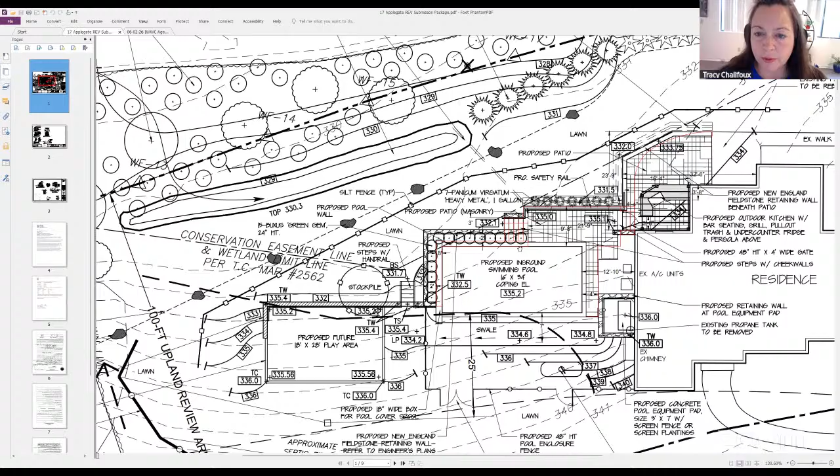Okay, is everyone able to view this clearly? Yes. Correct. Okay, so just to give you a little background, when Mr. Juliano went to apply for his building permit, an issue came up with the barrier to the swimming pool, because if you recall, this corner of the swimming pool, sort of the upper left corner here, was basically a retaining wall. The pool wall and retaining wall are one and the same. And it came to the building inspector's attention that what if someone were to walk on top of this pool coping and fall because of the wall height?

So that resulted in a minor change of just adding a 2-foot wide planting bed here and a tightly planted boxwood hedge. So 15 boxwood green gem are being called for just to create this very dense hedge so that a person is either discouraged from walking here, or if they do, they're not going to fall off the wall.

And also another minor modification was Mr. Juliano realized that he really wanted an automatic safety pool cover. So the pool lengthened ever so slightly, just another about a foot to accommodate the automatic pool cover at the deep end here. And what we did to stay within as close to the footprint that was previously approved as possible was we narrowed these stairs that come down from the pool patio to the lower lawn. And we just wanted to have the least amount of impact, by not pushing activity towards the wetlands area.

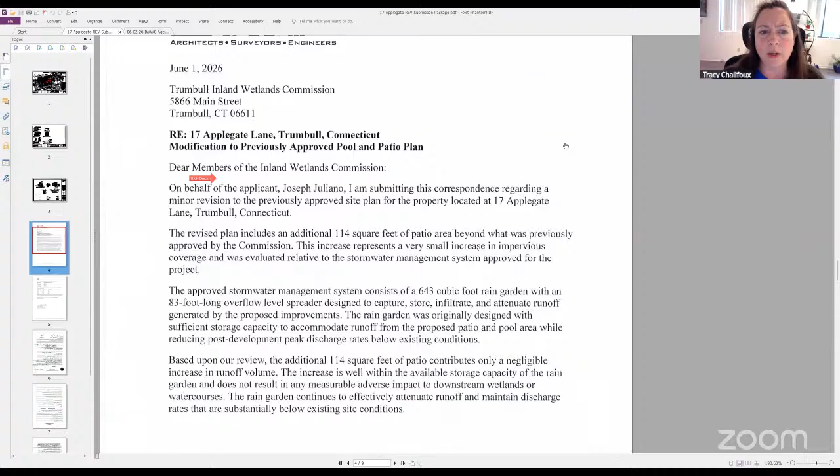And on June 1st, Manny prepared this letter. I don't know if this has been shared with the commission or with Tatiana, but he basically says that it represents a very small increase in impervious coverage and was evaluated relative to the stormwater management system approved for the project. So basically we're covered, it can accommodate the small increase.

So that's it in a nutshell. I'm happy to answer any of your questions and make any clarifications. Thank you.

Right, Tatiana, do you have any comments? Not at the moment. If you don't mind, Tracy, could you please send this to us? I don't believe we received this letter. Of course, thank you.

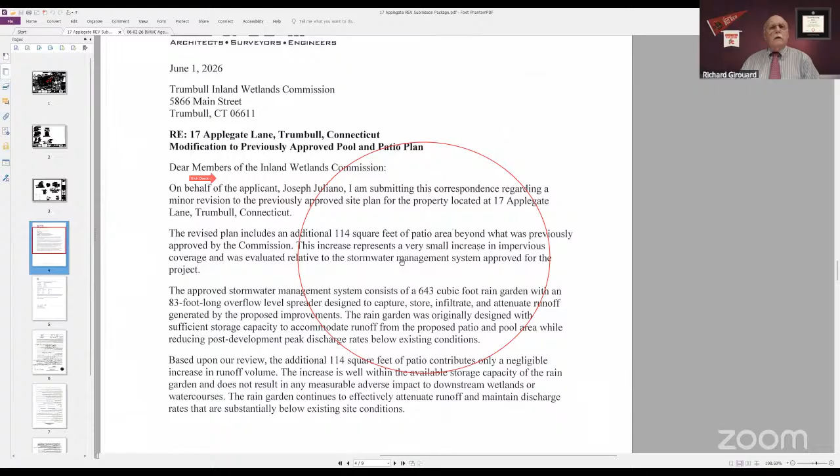All right, John, Mr. Chair? Mayor? Okay, go ahead, Carmine. Tracy, the application mentions a pergola, but you did not mention where that is, and I don't see it.

Yes, thank you. I neglected to mention that. I will show you now. The pergola is here, I'm tracing the perimeter of it. It's an open air structure, just some probably light wooden slats supported on a few posts, right within this area above the outdoor kitchen.

Is that allowed with a grill like that? It may depend on the material of the pergola, and we're not that far with the design of it. I don't know if the owner is considering like a composite or a metal type structure. We don't have the details on this at this point in time.

That's usually a fire marshal issue. We could check with the fire marshal to see what is acceptable. It's true, David, but Carmine is putting on his Nichols fire hat there, so he serves on that commission.

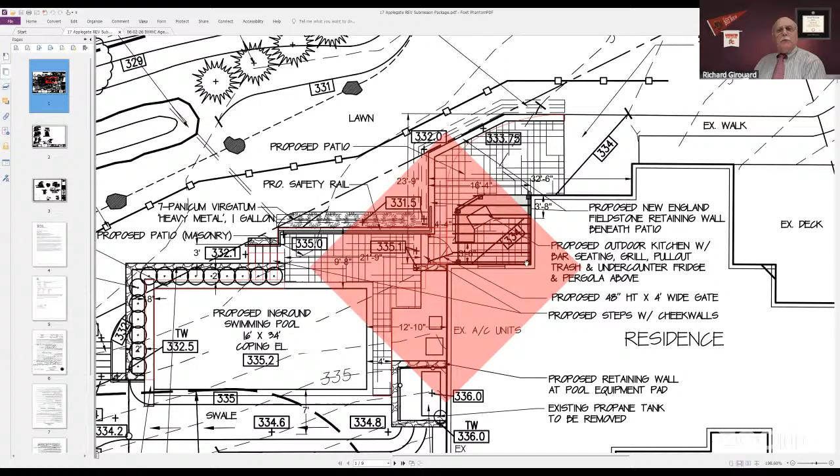All right, any other questions? No, I'm not the fire marshal. No, but you're there watching out. That's good, it's a good question. Anything else, Carmine? I don't pay their bills, I don't fight the fires. There you go.

All right, any other questions from the commission? All right, looks like we're good.

Nope, no. Can you see that? Tunnel vision. No, it's just gone. Is it something with the pointer? This just happened, started on the last application too. Is this something with Zoom, Bill? I've not seen that before, and I'm on a lot of Zoom meetings. Just blame it on Bill. That's it, I will. Is there a setting for a pointer that got messed up?

Let me ask, is Tracy working with you? Tracy, are you working with this applicant? Can you hear me? Yes. I'm sorry, I was away for a moment. Are we on Governor's Ridge? No, not yet. It'll be a while. All right.

At this point, maybe we should table this and go through a couple others, and let her see if she can get somebody to help her with that. Good idea. Should we have somebody else test the sharing of screen to see if there's an issue with Zoom? I'll do it. It won't let me, I'm blocked. Somebody else want to try it?

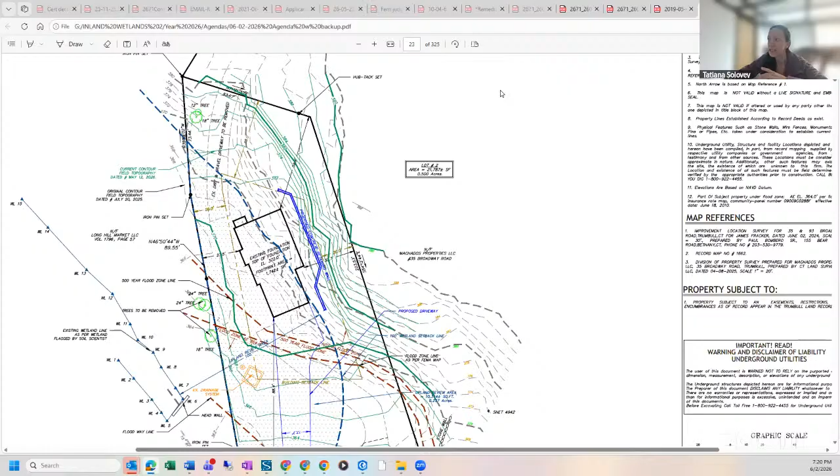She's sharing her screen, but we're getting the same issue with the big red diamond. I saw it pop up, but then it disappeared. Do you still see it? No, I don't see it at the moment, it disappeared right away. All right, Veronica, would you like to share your screen again? I'll stop sharing. Sure. Okay, I'll also email you the presentation, so you're probably going to receive it if we can't show it here.

Tatiana, is this a presentation? Have we received this? Can you see my screen now? Yeah, so far so good. No, this looks like it's just the PDF itself. Yeah, that's the PDF. Yeah, this looks good. Okay, can you see the entire screen? Awesome, thank you, the entire PDF we can see. Yes, that's what we need, right?

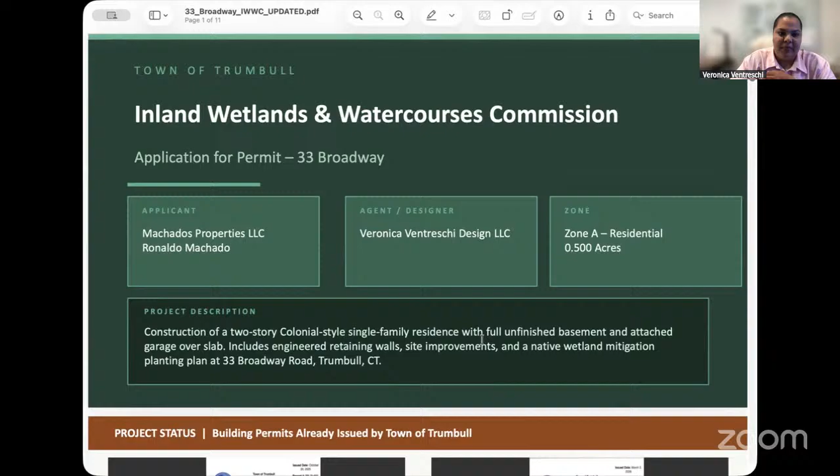Okay, so we are here for 33 Broadway in the name of Ronaldo Machado. We are planning to build a two-story colonial style single family home with a full unfinished basement, and we have an attached garage as well. Okay, let me interrupt you for a second.

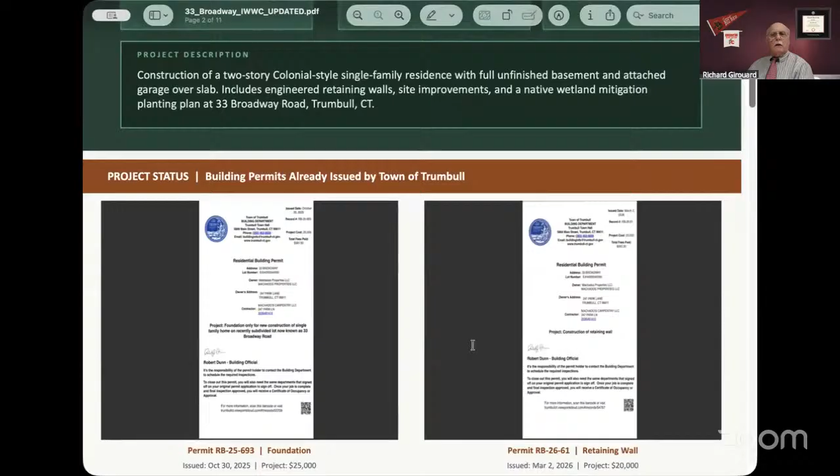We're seeing nothing on the screen that's showing a plan. That's the next one, we can see the PowerPoint, Mr. Chairman. Yeah, she's on the intro page. All right, can we move to the other one? So as you're talking, I'm just giving you an overview of the application. So here we have the two permits that the client has already got for the property. We have the residential building permit for the foundation, which is already in place in the lot.

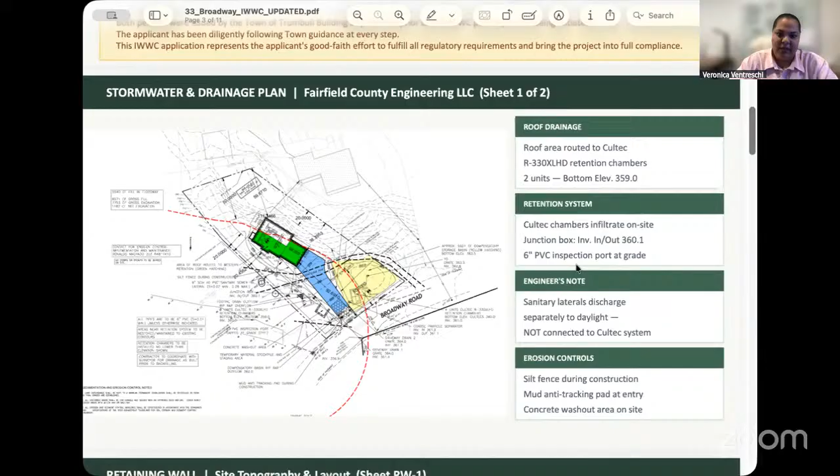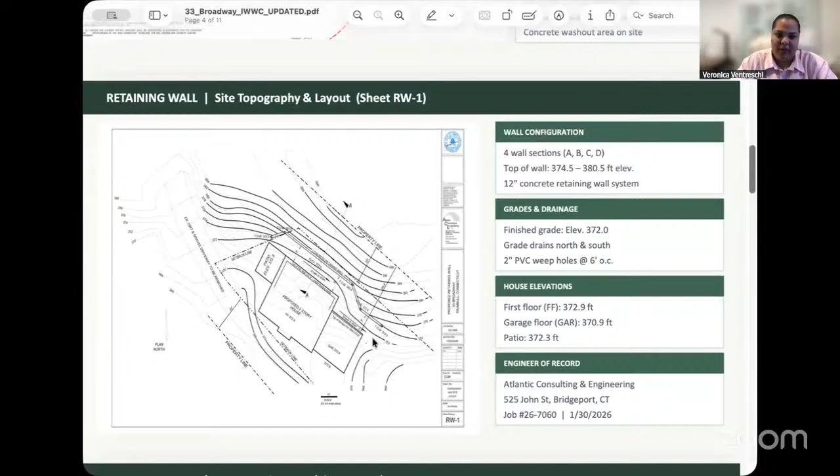And also we got the retaining wall permit for this application, issued by the Town of Trumbull. We have the storm drainage plan that was reviewed per Tatiana's request. So everything is in place. The engineer is already in the meeting, if you guys have any questions he's here for that. We also have the plans for the retaining wall in the rear of the property, that in the walkthrough we could show everything that's going to be built there. We have the drainage system for that as well, and also we have the revision of the survey.

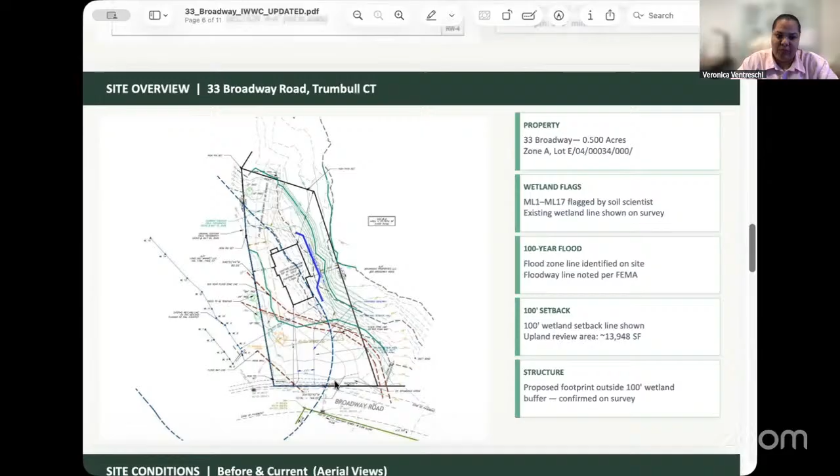Then we have the FEMA line in here, and we have the 100 feet wetlands line here also. We have the retaining wall showing in place. We have a minor change from the beginning of the initial process, which was the driveway. Initially the driveway would access the front of the house, and now it's sideways. That's the change we made for this project.

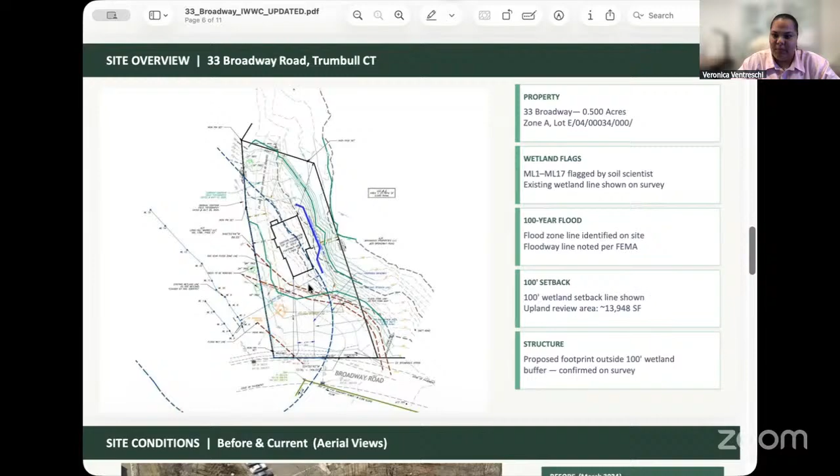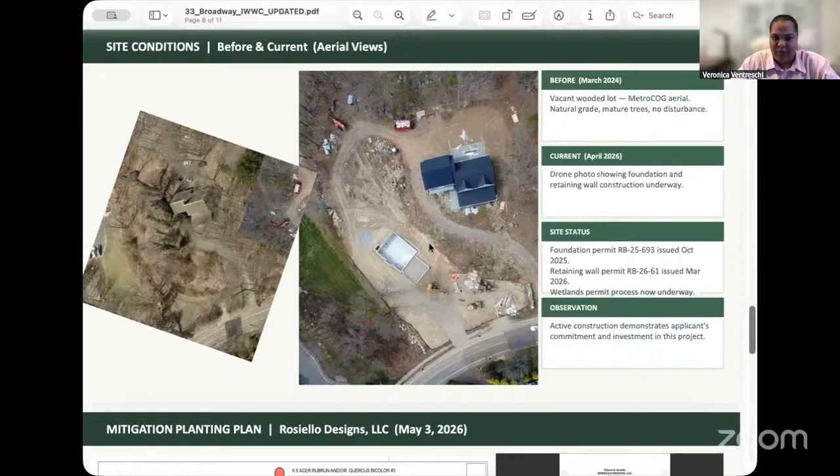Here we have the before view. Before it was just one lot. We made the subdivision process, and now we have 35 Broadway on top for the existing house, and the new house is proposed on this area of 33 Broadway. Here's the photo of the existing site, so we have the foundation here on site, the garage, and here will be the driveway to access. Also, we're going to have the retaining wall in the rear of the property.

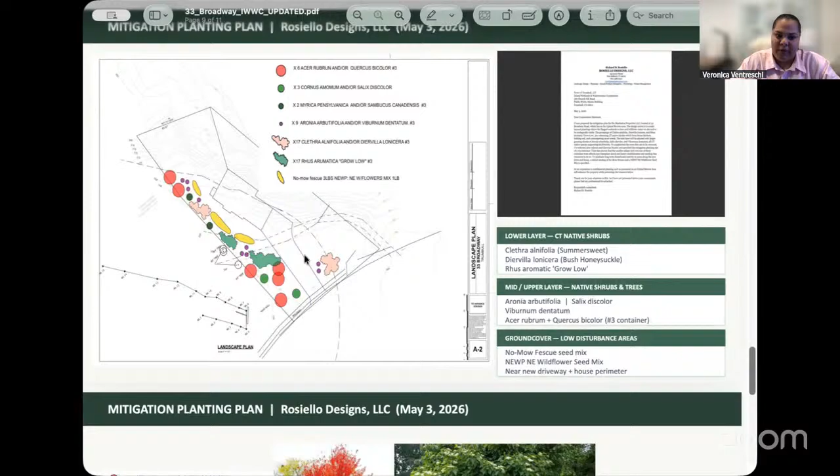Also, we have the landscape plan. Unfortunately, the landscaper wasn't able to join the meeting, but we have updated it as well with the new driveway. So we have to relocate some trees that he proposed.

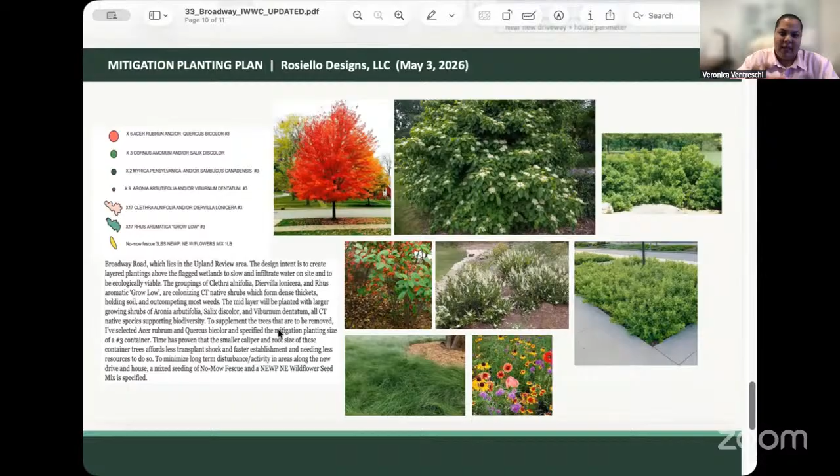All the trees are going to be CT native. He made all the plans to situate near the wetlands line and FEMA line as well. And that's the overview of the application.

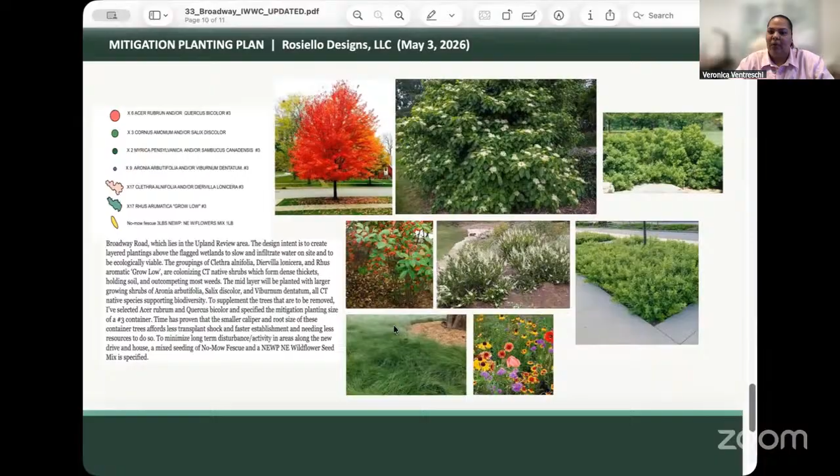If you have any questions, the civil engineer is here, and the client's lawyer and the client are on the meeting as well. Tatiana, the planting plan was the one that we got on Friday. That came in late, right?

The hard copies, the full-size hard copies with topography, were dropped off on Friday, that is correct. But I think a smaller print was submitted earlier, with the application as well.

Reason I'm asking, did Bob or David, do either of you have the planting plan before you, or have you been able to see it? I'm looking at it on the screen right now. The planting along the wetlands and the property line, that's going to get

modified by the request from the property that they've encroached on. So that is going to be modified, and I'm very concerned about the steep slope behind the retaining wall. I know it's beyond the 100-foot setback, but that's an environmental concern right there.

per neighbor's request by Green Giants, but they have to be planted on Soretta's property, not on the subject property. So applicant has to still plant everything that's shown on the screen, in addition to the trees that they have to make up for on Soretta's property, correct? Yes. Okay, thank you. We are talking about these trees located next door, right?

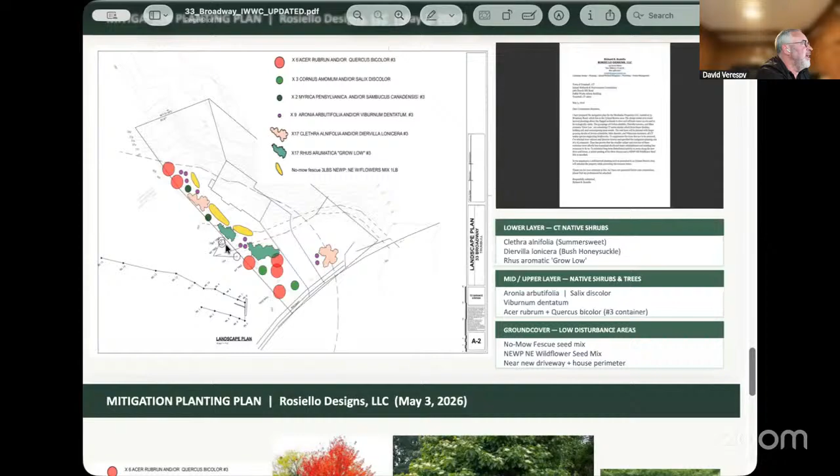My concern there is we're taking native shade trees and replacing them with green giant arborvitaes, which have very little environmental or ecological value other than screening. I think if 3 deciduous shade trees are impacted here, which looks to be the case, or maybe 4, that should be replaced with 4 deciduous trees that are native as well.

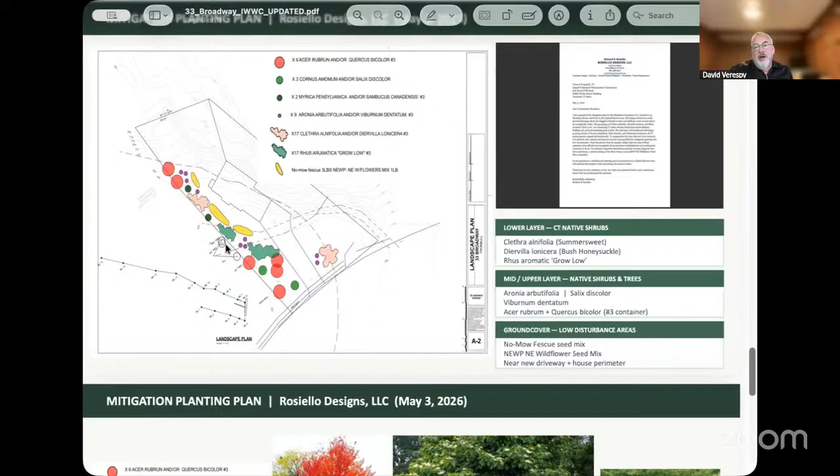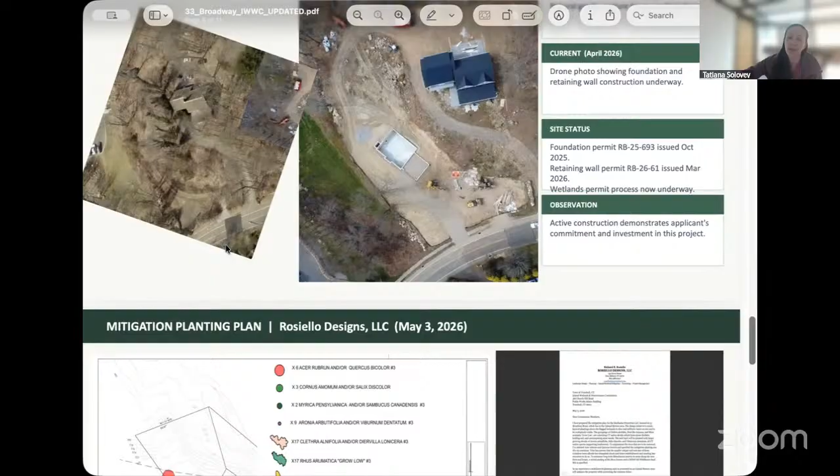Okay, thank you. So they would have to add 4 deciduous trees to this plan in addition to what's being requested by the neighbor, right? Correct. Wouldn't Mike Soretta have some say in this too, though?

It's his property. Oh yes, John, we have received a letter from the neighboring property. Excuse me, it is attached to the agenda. Yeah, I saw that. You saw that? Yes. Let me ask you a question, Tatiana.

If this were brought back down to the original topography and all that, would these trees not be as impacted? Because right now they've got somewhere between 2 and 3 feet, maybe more, of soil retained. They're going to be dead in a year or two. So Bob, you could answer this better about the impact of compaction and soil, and it's hard to see what kind of trees these are.

Basically what happens is with the addition of any material over the system here, the oxygen levels are being reduced, water levels increasing, and a rot takes place. Basically suffocation due to water, or a lack of air, a lack of oxygen on the root system, and it is a slow death. Even minor additions to the root system are critical to the survival of the tree, let alone multiple feet. Even inches would ultimately affect the tree going forward.

All right, thank you, Bob. So back to Tatiana.

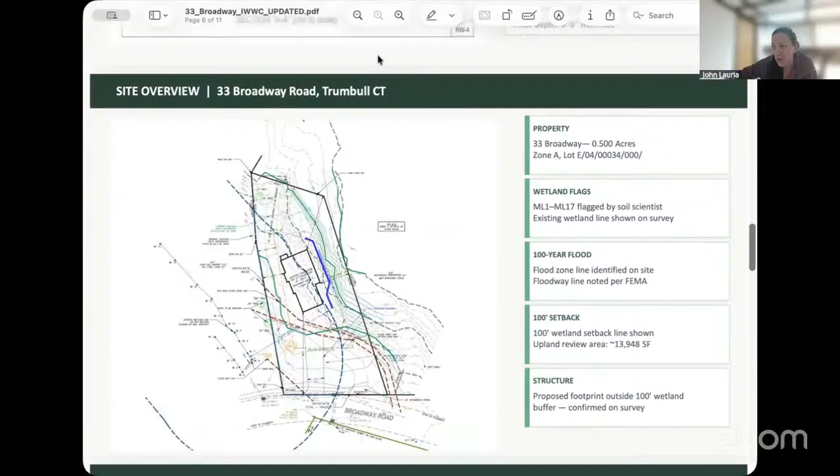Veronica, would you like to, do you have a survey? Yes, we do have a survey. Yep, that's this one. It's kind of reduced, so it's hard to see if you zoom in, but it looks like it's about a couple feet, I think at least, because I live in that area.

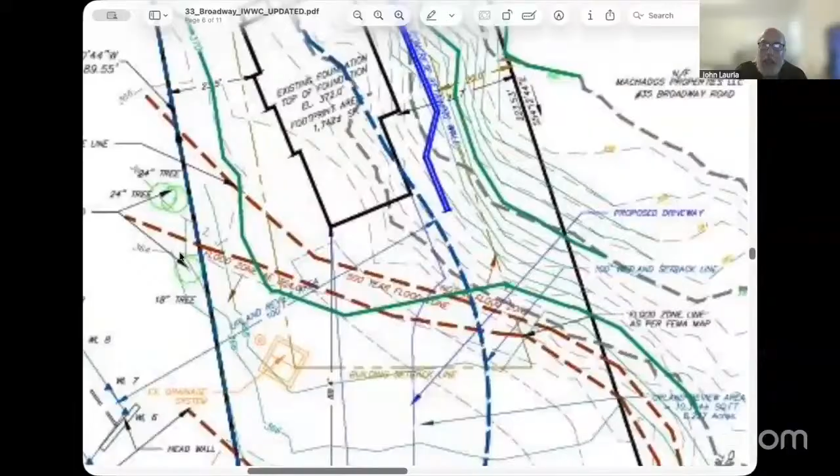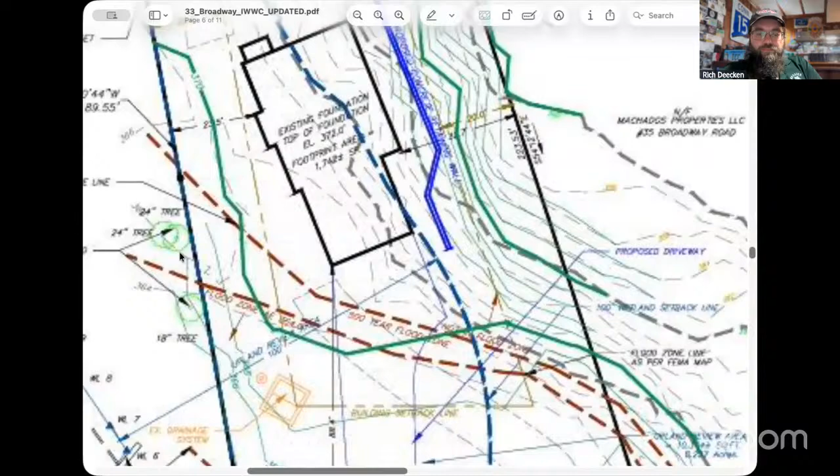If I could say something about that ground there where that house is built, it's a bog underneath there. I don't see how they could put a footing down that deep. What they did, in my opinion, was they put a footing down, built walls up, and then pulled all the dirt from the hill down and built up around the house. That's all built fill. That's not native soil. That's why we have a problem now with the floodway, because it's been filled in. What's there is there, but it was done wrong.

A question for Mr. Lauria. Go ahead, Rich. Mr. Lauria, John, are you concerned about excessive erosion? I mean, if there was substandard work done here, if somebody cleared out the area, it's going to leak.

What happens to the foundation of the house really isn't a concern of the Wetlands Commission, is it? But I'm concerned about what's down there under those footings - it's a peat bog. Well, we know that from the work even next door. And Mike Serta even told me that's why they didn't build in that last corner. He says it's all mud back in there.

So I guess the bigger concern, John, is are you more concerned about the foundation crumbling or that the entire yard is going to erode into the floodway? Well, we've actually added a big slope into the ravine there, into the Farrars Brook. So when water comes sheeting down, I don't see how that water detention system they put in is going to do very much. It's putting fill right next to the stream.

Isn't there also a significant amount of sand that was placed there that has no anti-erosion value? I think the material you see on the side of the hill is what was used, that's why they took the hill down. So a lot of that area was sand - what you see in the hill. No, before it was much more level, closer to the same level as the street. It did have some elevation above it, of course, but not as much as it has now.

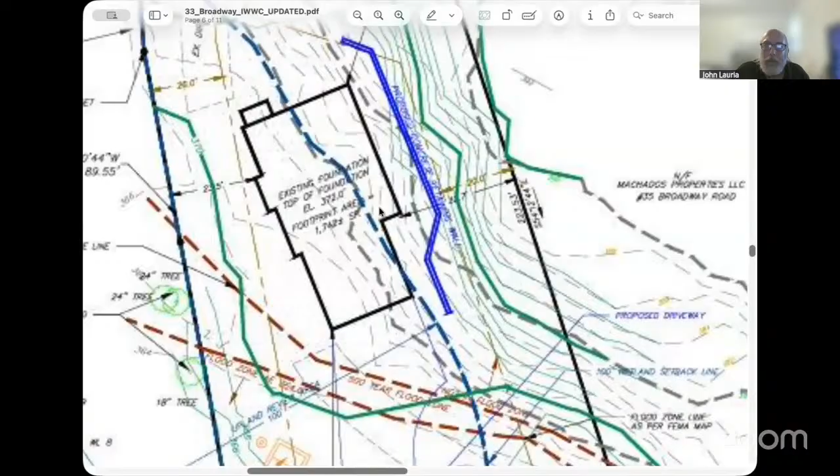I didn't have anything to do with the footing, the foundation, or the site work that's been done on the property. I just - regarding the drainage system, right, could you clarify the change that we made?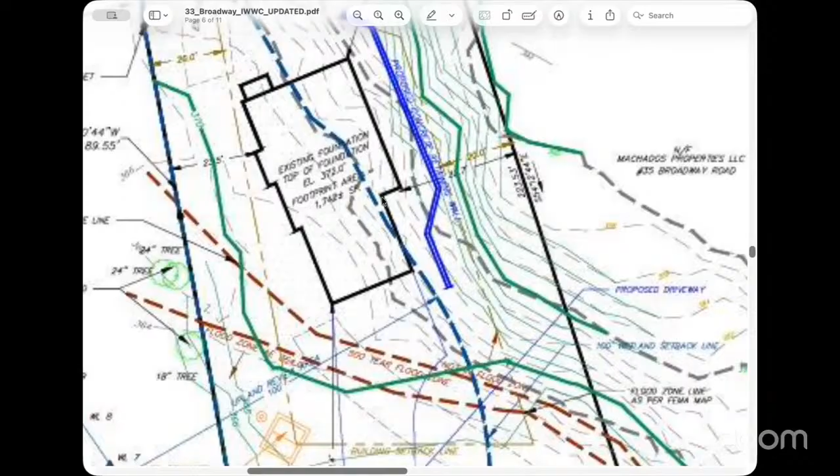Did you have anything to do with - can you tell us about the contours here? I don't know what the pre-existing contours were. I only had the existing. I'm sorry, all I have is the pre-existing contours, the original, at least as far as I believe, the original contours of the property, and what is proposed. I can't say what is out there right now. We have the photos of the before.

The state has LiDAR that goes back a few years, so we may be able to pull it from that. You can see it on the left there, even. Yeah, that was the pre-existing condition. So this was the berm here as well. You can see the berm on the left side.

And John, can you see that was that now removed? We're above the berm. Was the berm removed or did it die? No, we put more dirt that's higher than the berm now. Is that what directly led to the trees failing?

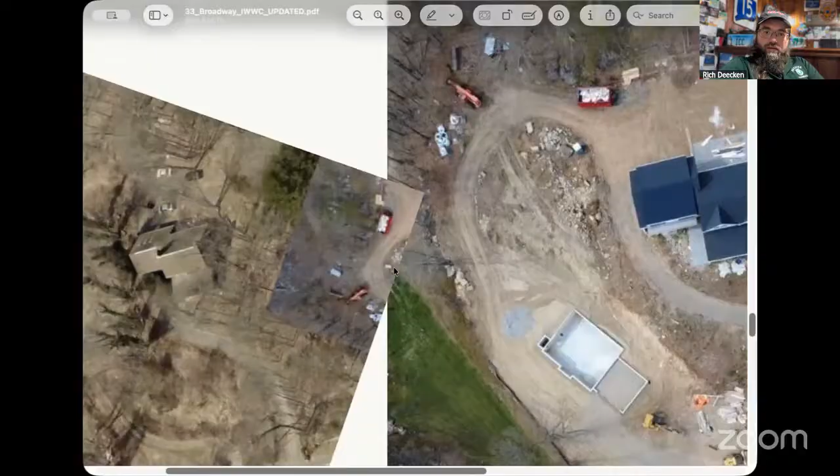Part of it. This is the before and this is the existing conditions. And so the dead trees would have been right on the left side? Yes, correct, down below here. This one was right here.

And when they removed those trees, that area was filled with sand? They didn't, you mean in the top? Right. They filled that with sand? No, they didn't fill here. Oh, okay. They're going to build the retaining wall right here in the rear. Okay, that's the plan. All right, Tatiana.

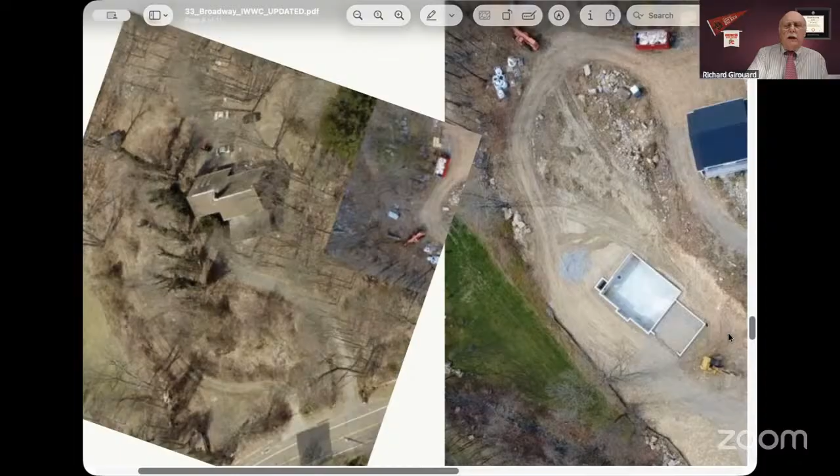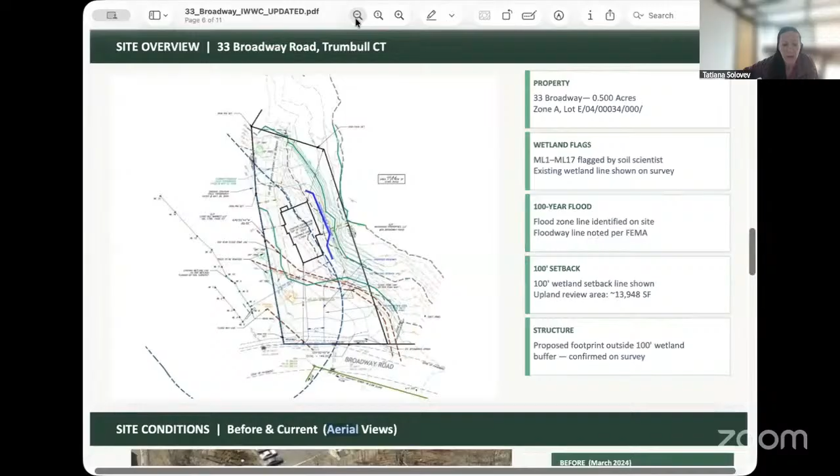Again, one of the conditions is going to be restoring the floodway. Can you go back to where it shows the floodway with that green line? Okay, are you with me, Tatiana? I'm here, yes. If I may, Veronica, ask you to stop - this is a reduced plan and it's kind of blurry, at least for me. I don't know if the commissioners may benefit from a clearer image that I'm happy to put on the screen. All right, if you can stop sharing and let Tatiana put hers on.

It's also attached to the agenda. It's the survey that was submitted. Sorry, let me move this. But you can see the pre-existing topography is depicted on the survey. So the 364 contour is now overlaid by 368 and 370. So there is fill about 2 to 4 feet according to this.

The floodway specifically, however, is in this corner. You see the red dash line. Yes. And there is about 2 feet of fill over there as well. So that all has to be restored.

However, this survey also does not encompass Soretta's property. So if any fill was placed beyond this property line, which it looks like it has been because there is encroachment there, it all has to be removed. The floodway has to be restored completely to its original condition. There can be no fill in that area whatsoever. And that also pertains to the boulders that were put down by the head wall? Correct. All right.

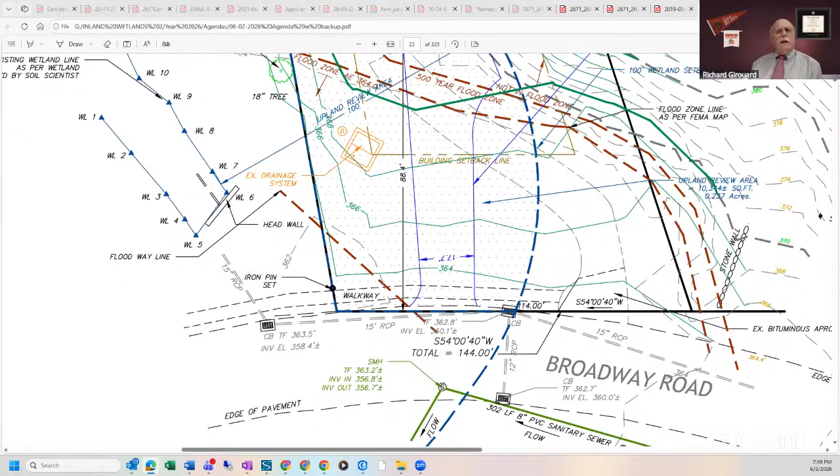So it looked like where those trees were, that's why they ended up buried, because somewhere between 2 and 4 feet came into that area? That's what it appears according to this survey. Yes, if we look at there's this yellow note that keeps popping up, but this is 364 contour, right? This line, this line. And then the green bold is 370. Let me see if I can highlight it maybe - better. Okay, 364, right? So this is pre-existing, and the bold green line...

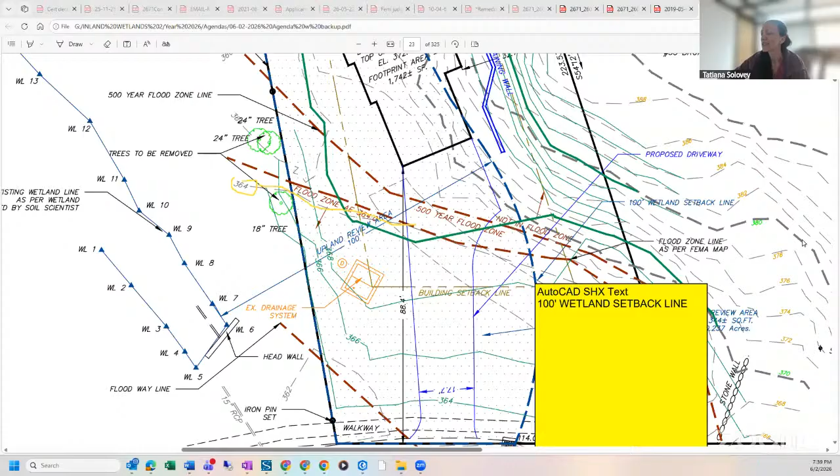Oh my God, I don't know what's happening, guys. But 370 is the existing topography. Does it make sense? That's why the trees ended up getting buried like they did.

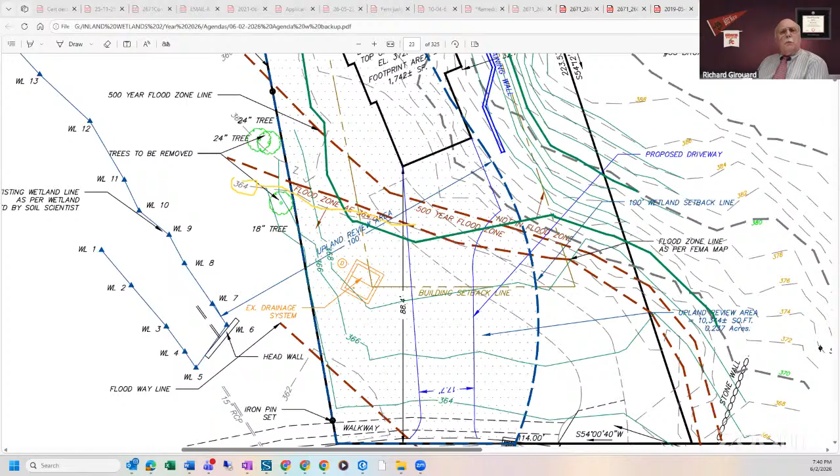And unfortunately for the applicant, you've caused the issue with the neighbor, so that's encroaching on his property now. So we've got to figure out how we're going to handle that. But as I said, you're going to have to definitely bring the floodway back to its original conditions. I'm going to open this up to the other commissioners for questions. Go ahead.

Comments, questions? Through the chair. Go ahead, Rich. There was a mention of encroachment on the neighboring property. Perhaps if Tatiana or others could just explain the level of the encroachment on the other property. I know there was some issue with work being contained to the specific property, and I believe the applicant failed to do so.

So if somebody could clarify how much work was done on the other property and if mitigation is needed. There was some confusion in the application process about that. You mean for 35 Broadway? Yeah, it would have been mentioned numerous times that work had been done on a neighboring property. No, what happened, Rich, is that they filled over onto Soretta's property, and that's what happened with filling the trees. They also put soil and boulders down into the floodway, with big boulders by the head wall. All of that's going to have to be removed. So why was work done on other properties? That seems unusual. I think there was an issue.

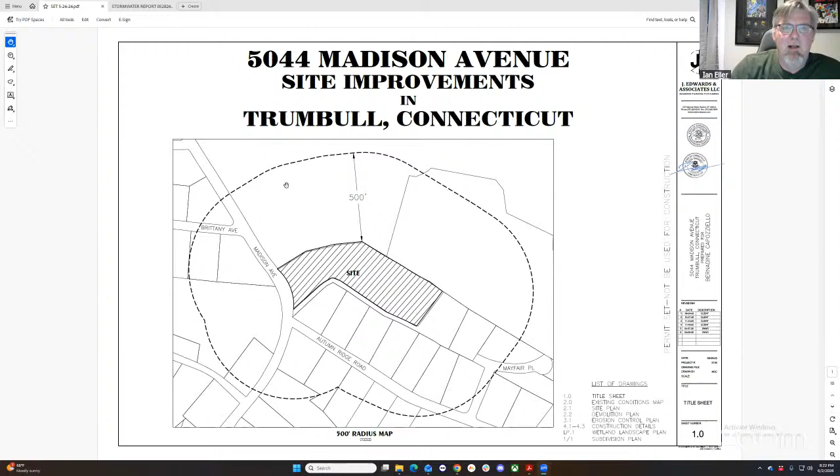Okay, so 5044 Madison Avenue is a single family home. It is on lot one of two from a subdivision. I'm going to spin through here and remind everybody that J. Edwards and Associates did this subdivision in the late 80s. We are this front lot that you see here. There is a driveway and access that leads to the rear lot, which is developed. I'll go back to the site plan now.

So this is the existing conditions plan. As you can see, the site is very, very wet. So our development is limited to the eastern end of the lot. We're going to access, like I said, by way of an existing driveway that leads up, and we're going to build a new driveway that goes in. I'll zoom in here so everybody can see.

We have the house going in and the septic system, obviously. We have the stormwater system here, doing some earthwork to get the house in, but trying to stay limited in the amount of disturbance as best we can.

I believe you guys had a walk, so you've seen what the layout is like. We had comments, and I will go through those unless somebody has a question before I start.

Oops, oh no. I have a question. Sure, back up to your existing conditions, please. Yeah.

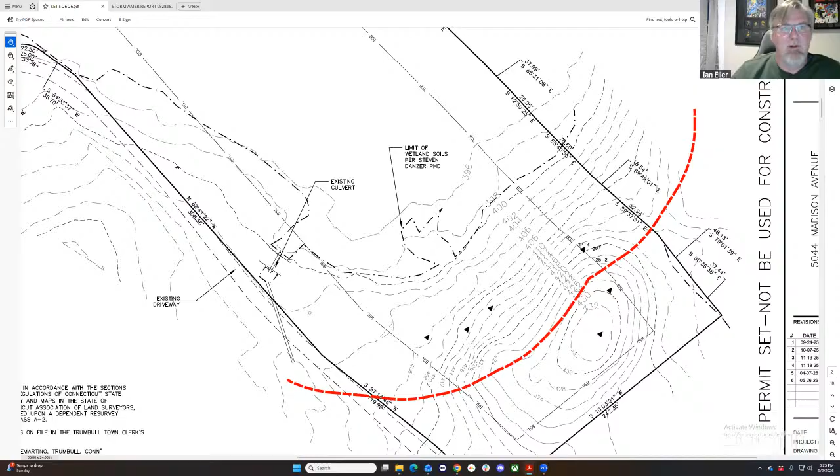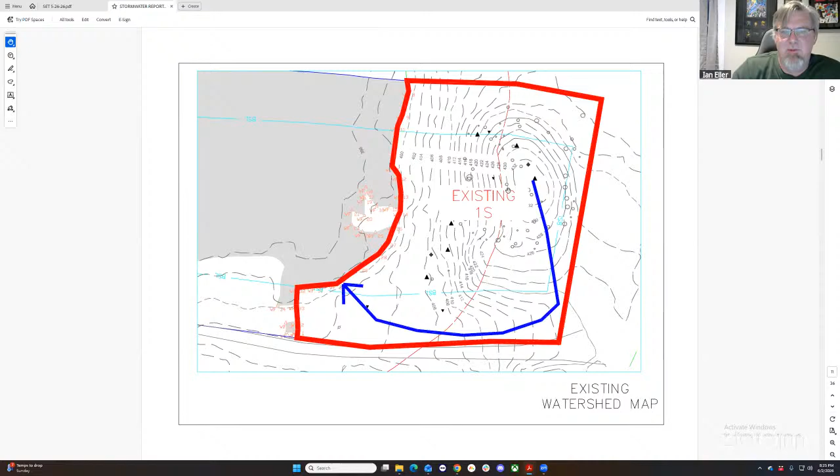So with regards to the comments we had, they were sent to us dated 4/7/2026, for the record, from the Town of Trumbull Engineering Department. The first comment was with regards to the drainage report, which you guys should have. I have it here. Specifically asking for watershed sub areas, and these have been added to the drainage report. So the main existing area and then the bypass area have been put in. We also have the typical soil types and that sort of thing.

Comment number 2 was with regards to the grass swales. The engineer on the project gave the following response, and I'll just read it out for posterity. Let me read the comment that was made for context: consider alternative to grass swales, splitting the SMS system, shortening swale length, piping, as they fill up and fail long-term; swale across the driveway must be piped. The engineer's comment was the current configuration is desirable to keep disturbance in the regulated area to a minimum. Two SMS systems would require double maintenance, and the swale is easily accessible for cleaning.

A catch basin has been added to receive the easterly swale. Let me go to the site plan. You can see that a catch basin was added here to the end of the swale to get that water caught correctly as opposed to just pouring through.

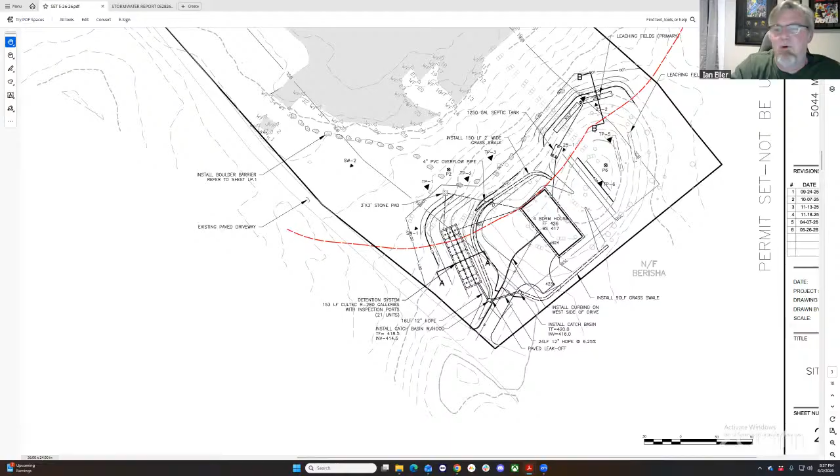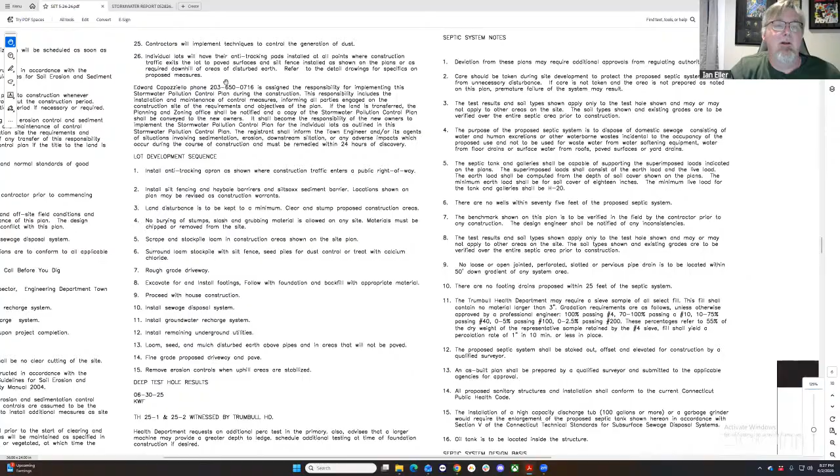Comment number 3 was a question regarding the name and phone number for the person assigned responsibility for implementation of the maintenance and erosion and sediment controls. That person appears in note number 26 under the Stormwater Pollution Control Plan notes on sheet 4.1. Note 26 is the owner of the property. As you can see, we've added that information in for compliance with that note.

The next one is about the bond estimate, that is understood. For the trees, we did add—where is it—a demo plan zoomed in. We indicated the trees and added a demolition plan showing all trees 8 inches in diameter or greater to be removed. Those are all shown in red on this plan.

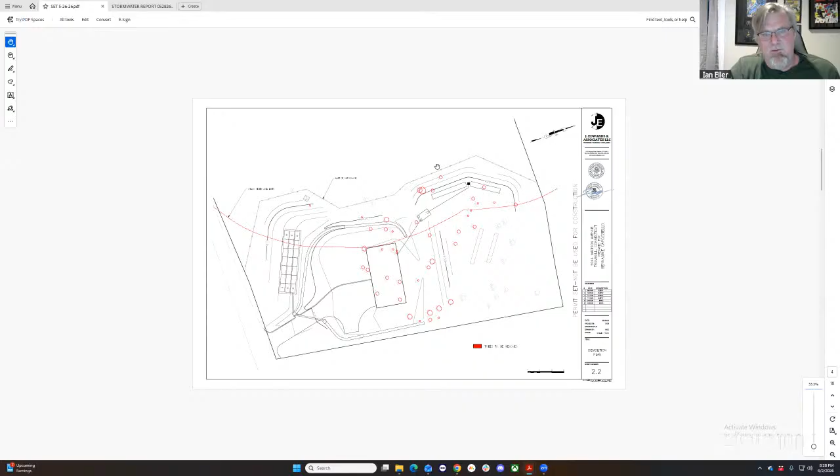Comment number 6 was to consider adding buffer plantings to the area between the wetlands and the house. We have a landscape plan that will show this. If you recall, when we discussed this last time, there was the idea of marking that area to help future owners understand where the limit of disturbance is. So this landscape plan, reflected on our site plan, shows this boulder wall that's existing down here has been extended up through the yard to make that easily understood to whoever ends up living in this house.

Number 7: no debris or stumps to be buried on site. That is indicated on the lot development sequence, on that same page 4.1. Next, provide documentation of driveway and construction access easements for 534 Madison Avenue—that is the piece in the back.

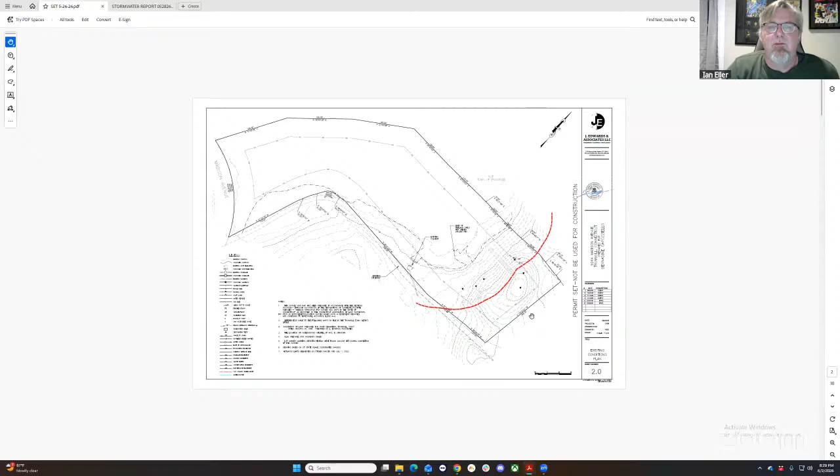So we'll go back here. We have this access, right? And it is accessible by way of... let me share this.

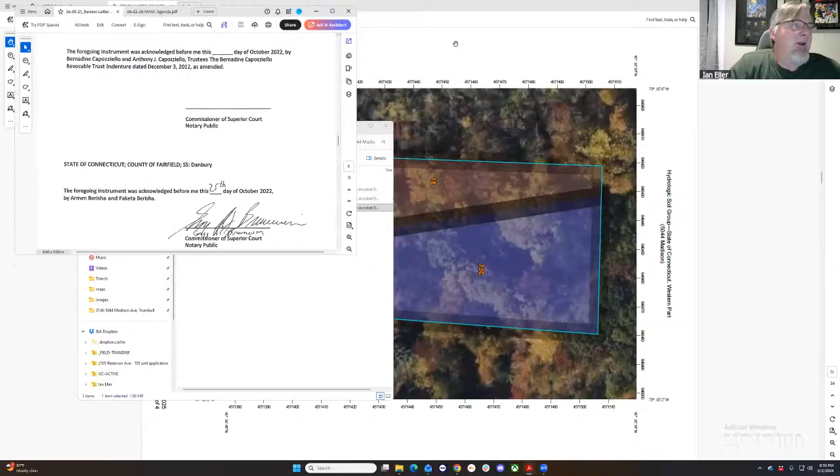That was comment number... oh no, see there's that red again. How many comments are there, Mr. Hawk? We are near the end. I believe there was a total of 10, maybe... oh sorry, there's 12.

So most of the rest of them, the next three are just understood: driveway permits, wetlands permits required, and as-built requirements, and we acknowledge that those are true. And then the final one, number 12, is as part of the site plan review process, a maximum fee of 75 will be charged.

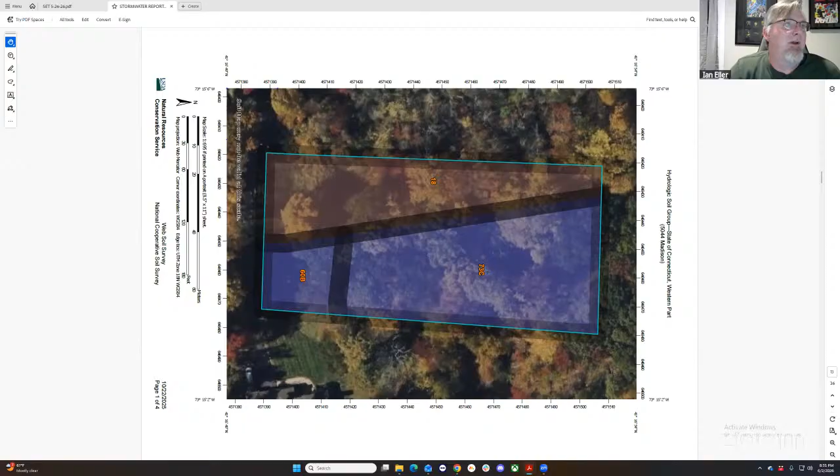So I'm happy to answer additional questions, and get you back to the site set so that you can see what's going on. All right, at this point, Tatiana or John Mayer, do you have any comments, questions?

Quick question, and going back to David's comment, I believe that wetland line shown on the survey is accurate, or at least there are wetlands off-site nearing on that border, so the offset should be corrected accordingly.

Okay, all right, so I will confirm one way or the other on those. As I understand the discussion I had with Nick, those are not accurate or were not flagged. So we'll look into it.

Yeah, it looks like wetlands are maybe on the neighboring properties, so they likely have not been flagged, but since you have a line right there, it maybe is accurate. But anyways, regarding the swale, I think we may have to do minor adjustments just because the 90-degree bend may cause issues long term, and we just see too frequently where they're failing. But that truly is minor and shouldn't affect this wetlands application because it's mostly outside of the regulated area.

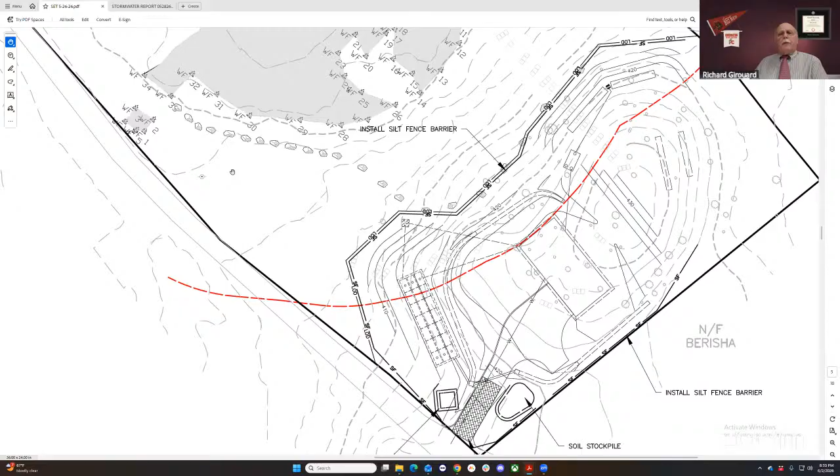Go ahead. Just in review of the landscape plan, my only comment was they've got bayberry on this planting plan. I think a dogwood, like a silky dogwood or a gray twig dogwood or red twig dogwood, might be more appropriate in this location as opposed to the bayberry.

And then a question for the commission is, are we happy with the layout of that boulder line shown on the plans? Does it give the homeowners enough area to utilize the property? Should we think about sliding it down the hill a little bit just so future homeowners aren't inclined to go into that area on their own? And do we need placards? Well, those are my comments, through the chair.

Well, actually, Carmine was next. I'll come to you next, Rich. Go ahead, Carmine. Well, my comment is regarding the boulder. Mr. Eller, I know what the definition of a boulder is, but what size boulder, minimum size boulder were you thinking of putting there? Well, to be honest, I wasn't, because that's with the landscape architect.

If I had to guess, it'd be a big enough rock that you'd trip over it. We're not going to build a wall or anything. No, I'm not asking about a wall. We had a previous application where we asked for a boulder wall and we were a little surprised at the size of the boulders that they put down.

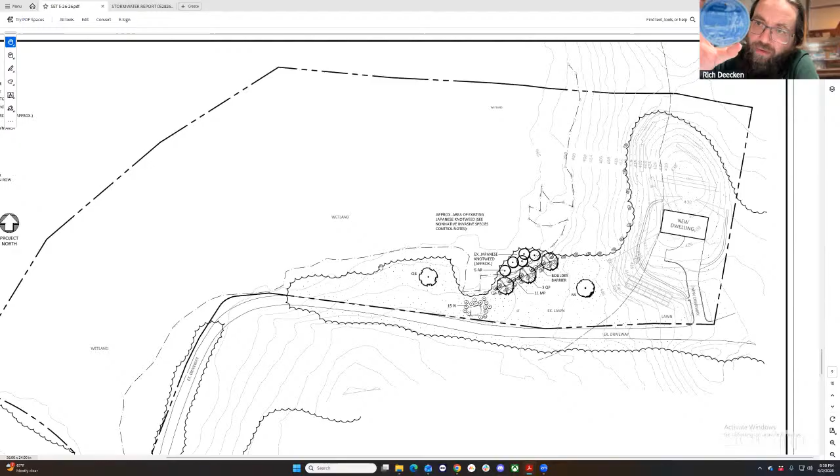But those indicate the wetland boundary, correct? Yes. Through the chair, that's not the boundary though, that's a landscaping demarcation. So would we rather move them down in front of the wetlands themselves, which is pretty obvious once you get down there that they are wetlands.

Okay, let's decide if we want to put them up and where we should put them. Through the chair, I'm going to jump in—that's what I was going to ask you, David, because you mentioned that we're kind of cutting in. Should we be moving this back? Would there be a problem of just marking where the wetlands are and letting them have a bigger lawn?

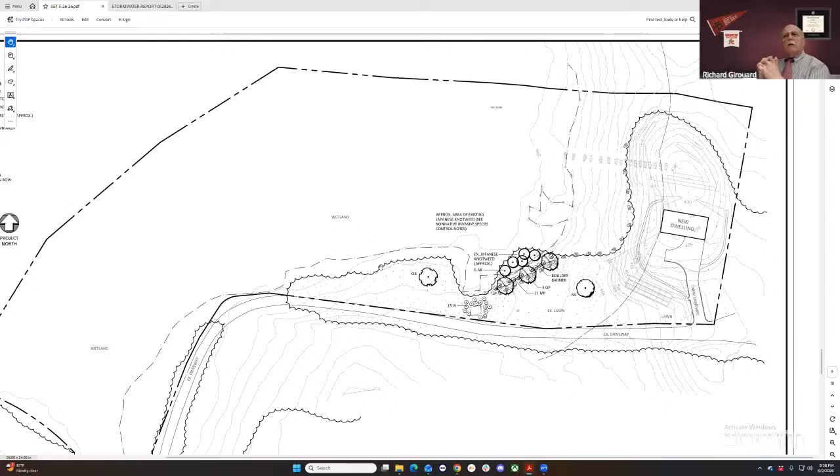Go ahead, David. Ian, can you zoom in on the developed portion of the property on this plan a little for me? Yeah, do you want this one or do you want me to switch to the site plan? This one's good because I can actually read the contours and the contour intervals.

What I was thinking was somewhere the 404 contour is about 20 feet off the wetlands. It's got a big flat area there. Or the 406 contour—you could slide the boulders down to like the 404 contour, or between the 404 and the 406. And the boulders should be big enough that they have to be machine placed and cannot be moved by hand.

And then every 10 feet like we said. But I think getting the boulder line closer to that 404, 406 contour gives future homeowners enough room that they have a decent lawn, should they choose to, and enough buffer area that the wetlands are protected. And if we wanted to do the placards at the wetland limit line, we could do that.

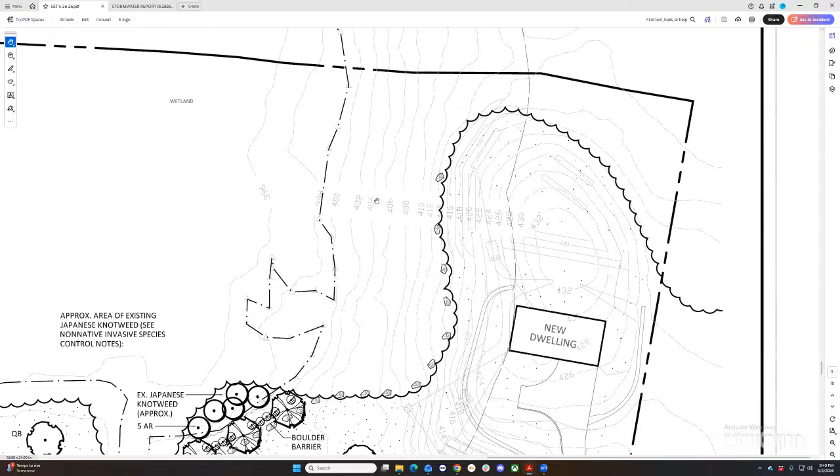This seems kind of strange that we're asking the applicant to cut down more trees. It just seems counterintuitive to what this commission is supposed to be doing for environmental protection. The applicant only asked for so much, but why are we giving more? If the applicant wanted it, why didn't they ask for it? Why are we ordering them to do continued additional cutting?

I don't like that either. I'd just rather give them what they asked for. I hear what you're saying, Dave, but they should have asked for it. I don't think we should be giving away things. Okay, that's why it's for discussion.

Through the chair, go ahead Rich. Just a couple of questions. First of all, there's a listing of Japanese knotweed on there. I'm assuming we're giving them unconditional approval to remove and eradicate all invasives.

I think there should be unconditional approval to remove any Japanese knotweed or other invasives in that area. It's a significant issue. We've seen the proliferation of knotweed and bamboo elsewhere in town. Large stands appear within a couple of years. So we should not only allow them, but require them to remove it. I'm sure they're happy to remove it.

In terms of the wooden posts with placards, the posts are small and easily seen, placed down in the wetland area, 10 yards apart - not a significant amount. We're not asking them to build a split rail fence or add boulders at the bottom, just a few wooden posts 10 yards apart, with placards making it clear there's a wetland boundary. We know the current owner will judiciously watch that, but we want to protect future owners who may not be told - sometimes the realtor doesn't get the full story. Someone in 5 or 20 years should know this is a wetlands boundary and they can't go past it. With wooden posts 10 yards apart, it should be very simple to maintain.

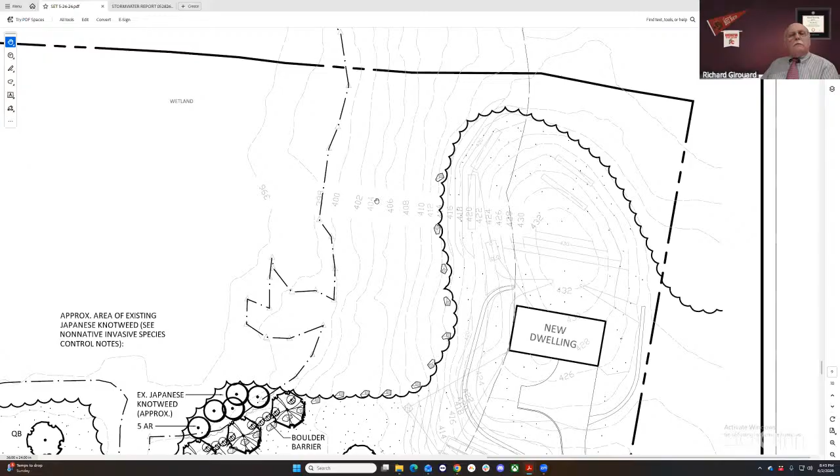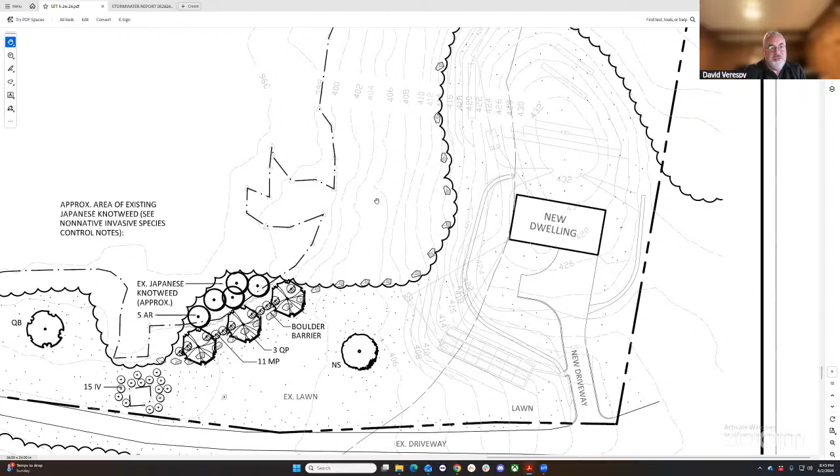The last point I had for David - we had mentioned a number of plants, and I know there was mention of installing new plants there instead of cutting them. I don't know if they had considered small evergreens or a small amount of serviceberries to be placed there. We could add Shadblow serviceberry to the planting list. I think what's shown is certainly appropriate and not uncommon for the area.

All right, Rich, so your thought is we would put 4x4 posts right on the border of the existing wetlands, so they know when they come up, 10 yards apart. It's very reasonable - again, we're not talking 10 feet. 10 yards or 10 feet? 10 yards. Okay, that's 30 feet. Okay, that's all right.

Through the chair, I'd like to make a comment. Go ahead, John. I went over to 17 Applegate today and looked at those posts and their placards - they aren't nailed on. They almost seem like they're being held on by a magnet or something. I didn't want to pull on them, but they're not nailed down. I don't know, when we walk that I'll check that. So you're going to go back over there to Applegate again? Yes. Okay, just wanted to make that comment. They have them up, but I thought they would be nailed, and I didn't want to pull on them in case it was a magnet or not. I don't know how they're fastened.

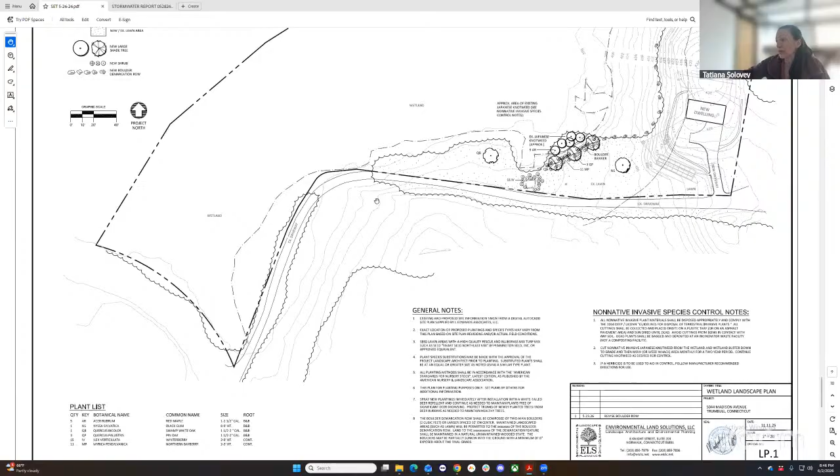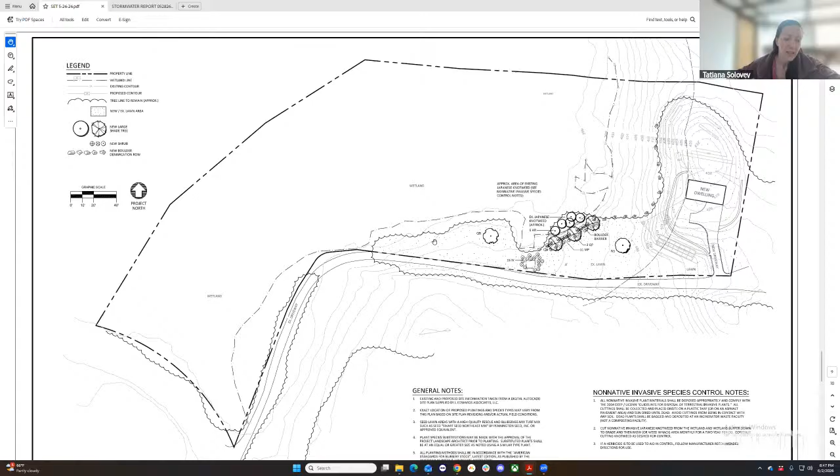Anything else we can think of on conditions? Through the chair, go ahead Tatiana. I'm looking at this wetland boundary and it zigzags through the property and is very long, plus there's potential additional wetland encroachment on the side. Historically the commission has demarcated an area not to be disturbed - I'm not saying a conservation easement, but it makes more sense with boulders and placards to be in one area. If that's not appropriate here, I'm not sure placards should follow this wetland line specifically - it's more disturbance, and it just doesn't make a lot of sense to me. I disagree - that says wetland boundaries on the placard, those are the boundaries. The boulders have nothing to do with the wetlands; the landscape architect decided to put those there, they weren't supposed to demarcate the wetlands, but the placards will. That's my opinion, Tatiana. That's fine, it's just not what historically has been done, and also wetland boundaries change, and those posts on their own won't last, which is why they've been combined with boulders from what I've seen, but it's up to you guys. We do pressure treated posts, don't we?

No, pressure treated 4x4 posts. Yeah, so they should last 25 years. And they should be 6 foot because we're 2 feet into the ground. It gives you a 4-foot high post. That's what we've been asking.

And those are not for the motion. It should be clear that they're not to be removed. If they're in the ground, someone who acquires the property should not be going out there and removing them. Well, that's just common sense. We'll go out there to check every now and then.

Okay, any other items that we can think of? Greg, are we pretty good? Yeah, I was talking to Tatiana about this earlier in the day. We'll probably require a site monitor. We're seeing more and more projects where stuff is not completed or areas are filled in that shouldn't be filled in, so we'll probably put in a condition for a site monitor to make sure the project follows through. It's on here because it's a new project and building.

Through the chair, go ahead Rich. I would just ask if Mr. Cernica could add a condition of approval for the removal of the Japanese knotweed and the other invasives. Yep, on the plan. That's just in the planting area, right? Yeah, in any part of the wetland.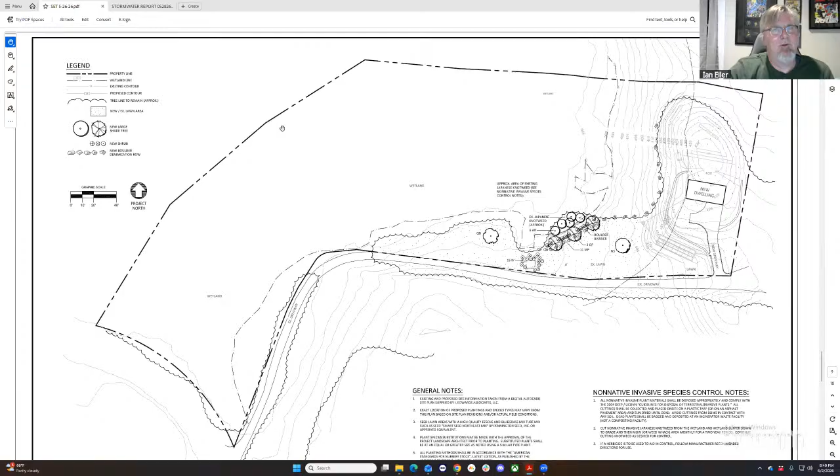That is where that came from originally, if I may remind you. So this boulder line was originally put on prior to the last time we came and saw you, by the landscape architect, to protect these wetlands and some of that clearing and planting that's going to happen there. And I don't remember who it was specifically.

Your commission asked that we continue the silt fence along the limits of disturbance for the actual project. That's why those are there. That was upon your guys' request. So that would be the limit of disturbance then. Correct. All right, thank you. Very good, that's defined, thank you.

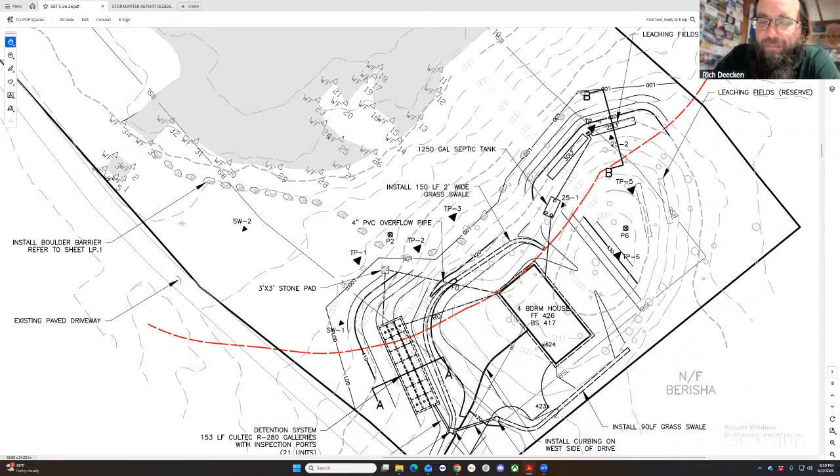And through the chair, if we could just go back, if Mr. Eller could go back to the last map, there was an issue, a listing on the bottom right in regards to the invasives. Oh, the landscape plan? Yes. Hold on. Yeah, to the right of the general notes, it said non-native control. If you could just go a little farther. Yeah, there we go.

Oh, sorry, I thought you were looking for the list of plantings. No problem. It just says that it's being cut and weed whacked. We know Japanese knotweed is going to come back. I know it's limiting it to cutting here. The Wetlands Commission, I'm sure, would be amenable to total removal and eradication if that includes digging these plants out. That should be considered as a viable option.

We're not limiting you to weed whacking, because it says weed whacking monthly for a 2-year period. That means after 2 years, it's just going to come right back. So if the commission is going to approve total eradication, those should be dug up and removed, and giving the applicant the opportunity to do that should be allowed. It's pretty defined on what they can do, including herbicides and stuff.

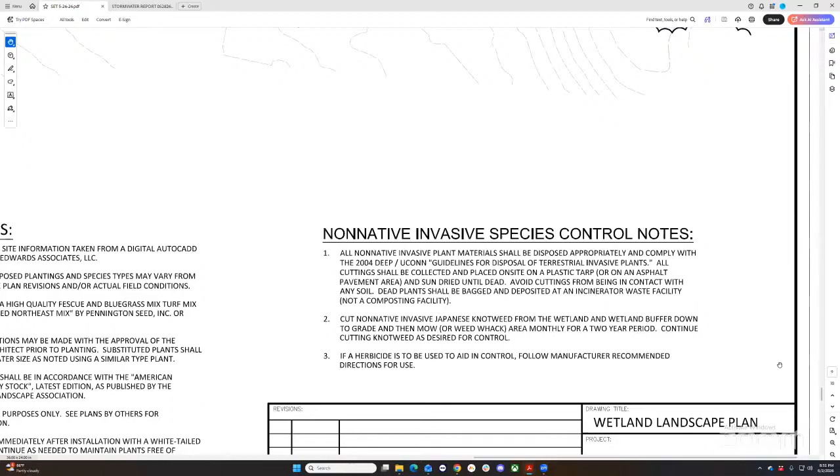So I'm a little concerned about the herbicides, since that wetland may be the headwaters of the eastern reservoir. I believe it is. That's why they should be dug out and removed instead of using pesticide. Of course, we're using pesticides on the golf course, which is the same wetlands too, so I'm not intending to limit them or force them, but they should be allowed the opportunity to dig those up. As it's stated here, they can't go in the wetlands and remove them, they can only weed whack them, which seems somewhat silly.

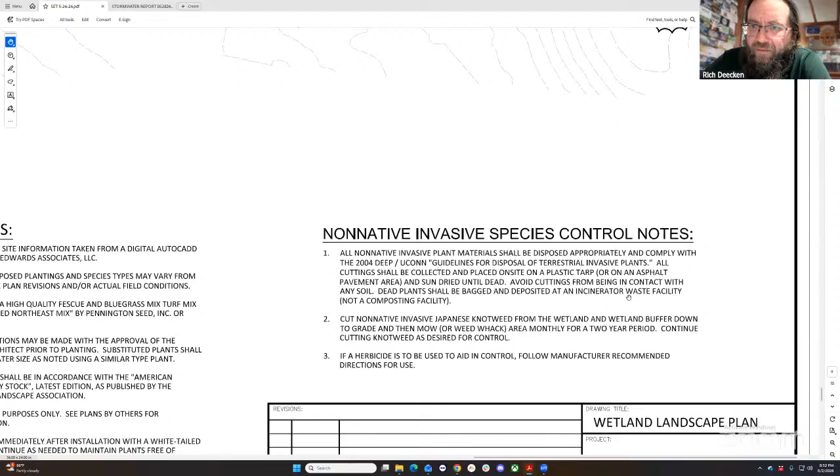So Greg, I need a motion to approve. Yeah, I'm still not clear what they want to do with invasives. I know we want to remove them in that wetland buffer area, but do we go into the wetlands or not? I'm just going to say the buffer for now. I think we are allowing them unconditional approval to go into the wetland strictly for the removal of invasives.

No clearing, but they should be allowed to remove them at any point in the entire wetland. That should always be approved and encouraged, by hand, spade and auger. That's a huge wetland, it's just loaded with phragmites and everything. We're not giving them permission to do the whole wetland. They're not there, it's unlikely they're going to, but with spade and auger, no machines, giving the homeowner the opportunity to remove them instead of saying there's invasives in this wetland, you're not allowed to remove them.

Those invasives are causing serious trouble. We've seen bamboo stands across New England, certainly across Trumbull. It allows the applicant at his or her leisure, when they see there's a problem, they can go in there. Probably do it anyway, Rich. But right now, this way they have permission to do so. Yeah, we're giving them permission, we're not ordering them. Permission to dig up those particular invasive plants, and that's that.

All right, any plant listed on the non-native list is approved in that area. Right, native northern southern New England. Or what Dave would probably give us the specific region. Was it listed as southern New England, David? For invasives? Is there a specific region where we go by? Connecticut has a list, it's the Connecticut Invasive Plant Working Group. Excellent, they have a list. Any plants on that list are eligible for unconditional removal. Yes, that works. All right.

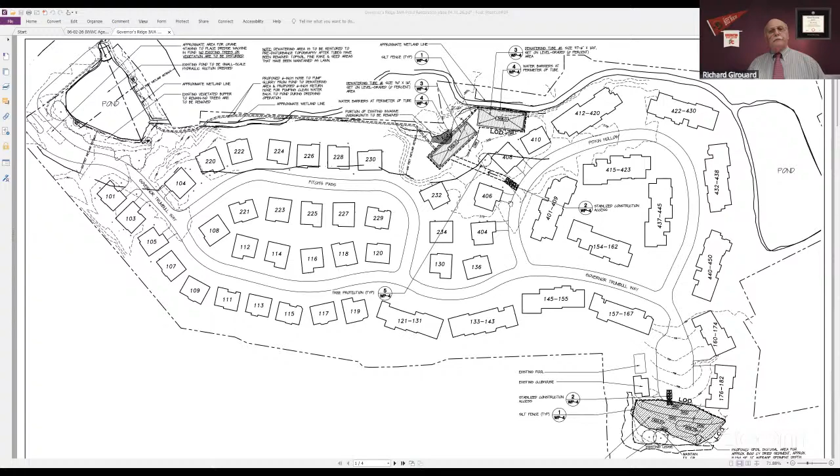Okay, is that visible to you all? Yes. Okay, so I know that a commissioner site walk was conducted recently, and I'd like to point out that there have been no changes to the site plans since that walk took place. I'm happy to go through and summarize the proposed dredging plan again, if you'd like an abbreviated presentation and then questions, that's great.

I thought last month's presentation was pretty good, pretty complete, so I think you can kind of skim. Sure, I'll just speak very generally then.

Here's the pond, it's about a half-acre pond. As you saw, it's filled with sediment. We're proposing hydraulic suction dredging. The slurry would be pumped to this temporary dewatering area staged to the north of units 408 and 410. The bags would be surrounded by water barriers and erosion controls. The water would be directed back to the stream so that the pond would remain hydrated throughout the process.

There's a construction access here between units 406 and 408. And once the sediment is completely dewatered and dried, the tubes would be cut open and the sediment trucked through the development to a non-wetland and non-wetland buffer disposal area.

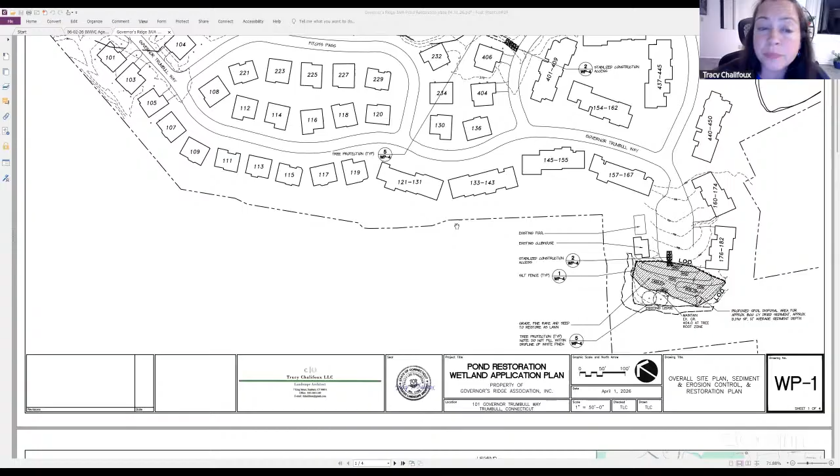This grading plan indicates the topography in order to lose the 800 cubic yards of dried sediment, and silt fence would remain in place until this area is completely revegetated, in this case with grass. Just a reminder that no trees are to be removed as part of this application, and the dredge machine would be craned into the pond so that we would not disturb the substantial existing buffer along this shoreline.

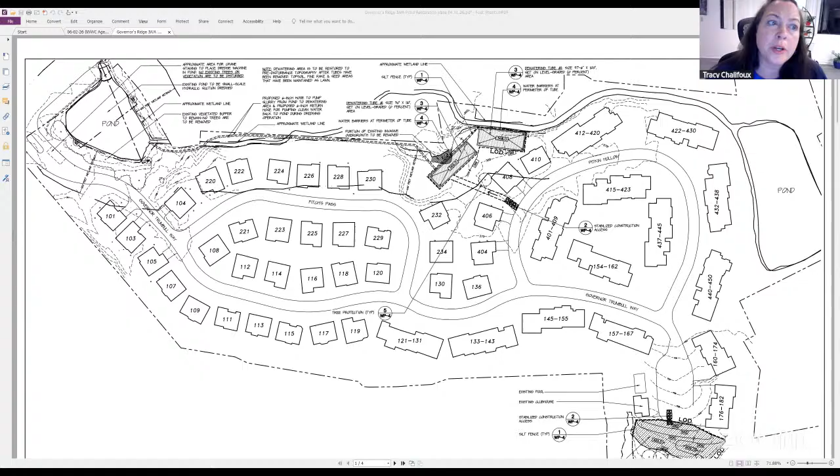Additional turbidity curtains could be added throughout the project as needed. Currently, one is proposed here, but I know during the last meeting a question came up about whether we should add more. Yes, we could certainly add one on the other side of the culvert along Main Street. It's something we keep an eye on throughout the process to determine if any sediment is becoming thick within the water, and the curtains are added as needed. As Mr. Amler can explain, the water quality as it seeps out of the bags is very, very clean, so we have not had this be an issue in the past.

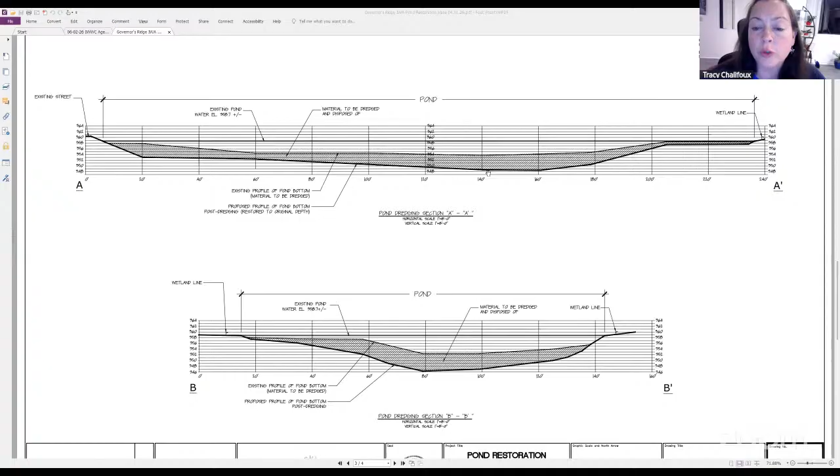And there are the pond sections. You can see the approximate amount of sediment that exists in the pond, indicated with a cross-hatched area, and we're just returning the pond to the original topography. We're not deepening it, we're not enlarging it, it's just back to what it had been before it filled in. Then you have all of your standard details here for the dredging project, and that summarizes it. So I'm happy to take any questions or turn it over to Mr. Amler.

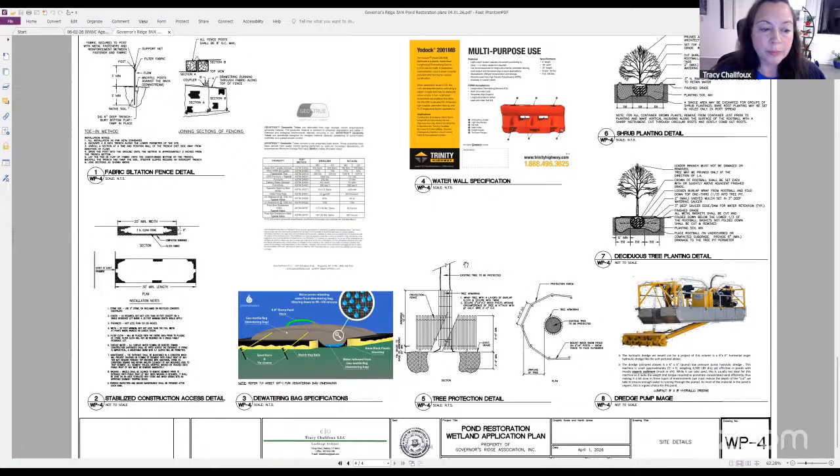Tatiana, questions, comments for Tracy? I'm good, thank you. All right, the commission, any comments, questions?

Through the chair, go ahead, Carmine. Just curious, the time frame, how long do you think this would take?

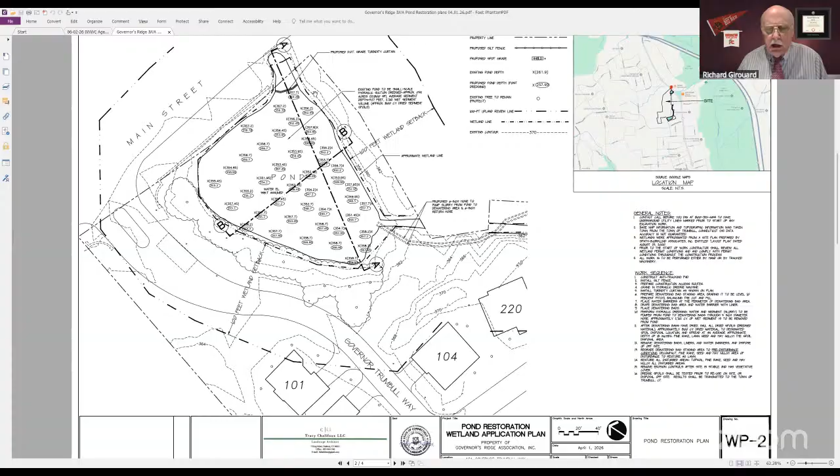If there be no other questions, all right, I'm looking to approve 2615 as submitted.

Greg: I make a motion to approve application 2615, a permit for hydraulic suction dredging of existing pond, temporary grading, disposal of dredge spoils, and restoration of all disturbed areas as lawn within a regulated area at 101 Governor Trumbull Way, in accordance with the Town of Trumbull Inland Wetlands and Watercourse Commission Section 1 General Conditions 1.1 to 1.10, and Section 3 Additional Conditions 3.1.

Turbidity control screens will be installed at the exit of the pond and at the opposite side of Main Street, both sides of the street. And 3.2, contractor to submit weekly progress reports and photos as the project progresses. Second it.

Go ahead Rich. Second. Okay, Tatiana, did we miss anything? We're good. All right, so we have a second on it.

I'm going to take a roll call. I'm a yes. Bob Ferrigno? Yes. Carmine? Yes. Greg? Yes. David? Yes. John? Yes. Rich? Yes. 7-0, it's approved. Good luck.